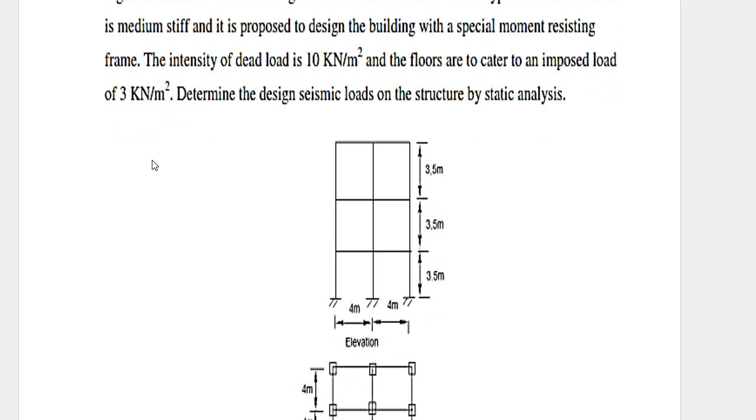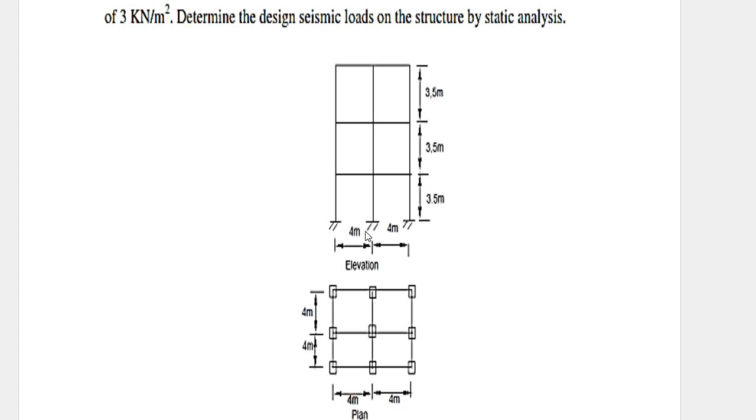So in the elevation, the height is 3.5 meter, 3.5 meter, 3.5 meter. The width between the two bays is 4 meter and 4 meter. Like that they have given the plan. Again it is 4 meter, 4 meter. This side it is 4 meter, 4 meter. Okay, now let's start with the calculation.

Here they have not mentioned any condition, so I'm assuming it is a brick infill. Consider with a brick infill. This is a condition I'm assuming. So according to this assumption, a few values will change. So we should calculate VB, that is base shear.

So base shear notation is VB and formula is Ah into W, where Ah formula is Z by 2 into I by R into Sa by g. This is the formula, where W stands for seismic weight of the building. Seismic weight is total weight of the building, and we will calculate the W later. First we will focus on this Ah.

So in this Ah, Z is a zone factor. Okay, zone factor value, how did I get this 0.36? You should go back to the problem and check the seismic zone. They have mentioned the building lies in zone 5. So according to that, I can decide this zone factor value Z. I will show you the code book.

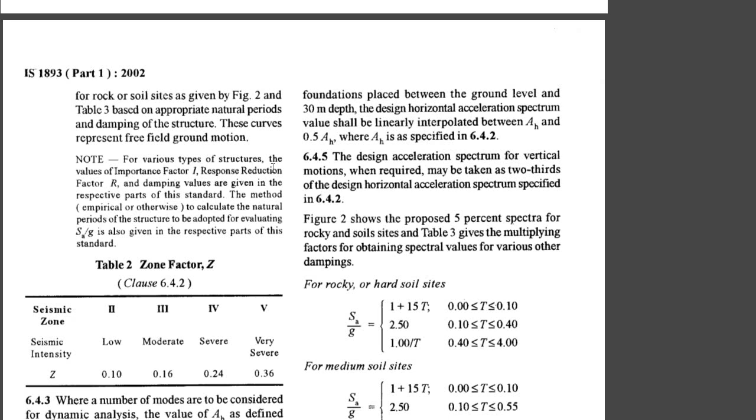Here for this problem, I am referring to the IS 1893 Part 1 2002 code book. Go to page 16. There you can check table 2. You will come across the zone factor table. So as you can see here, what are the different types of zones we have in India? It is zone 2, 3, 4 and 5. One is not there. So remember, one is not there. It starts from 2, ends at 5.

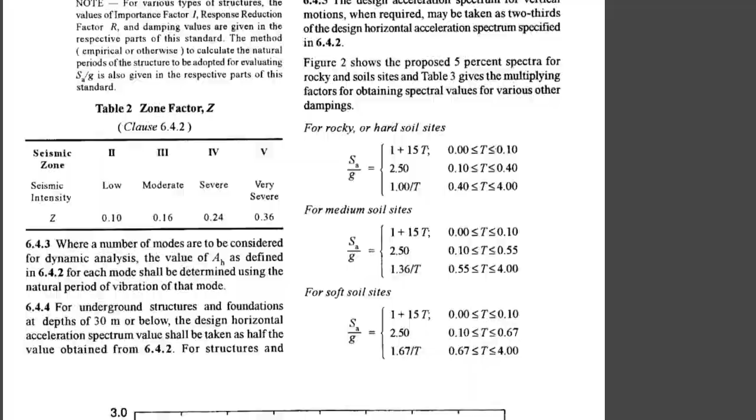So in the question they have given zone number as 5. So I should check this row. Zone 5 is this one. So zone 5 value is 0.36. So Z value is 0.36, and I have considered 0.36 in the calculation. Okay. Next, how did I take I as 1.5?

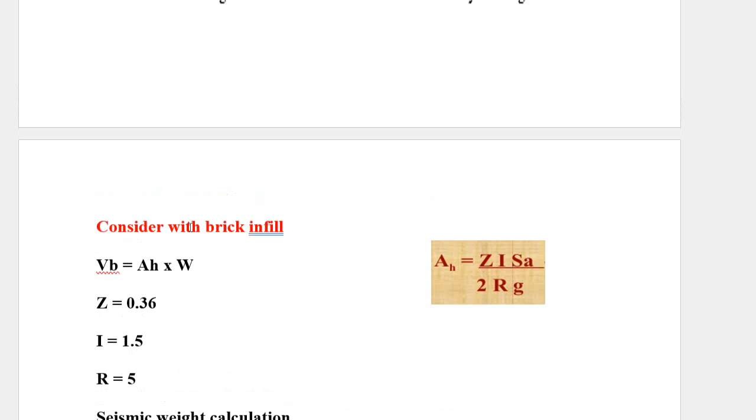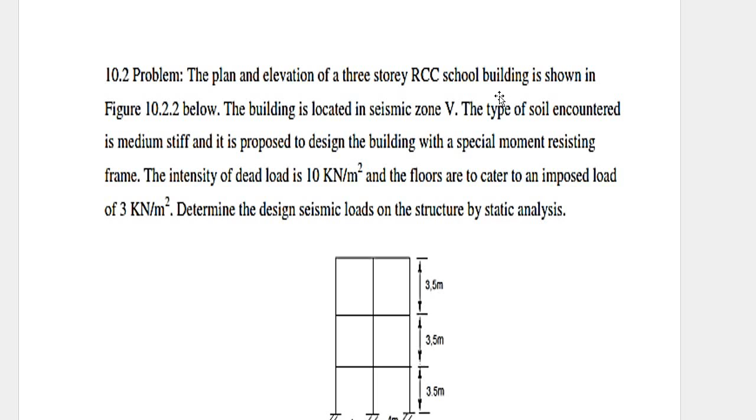For that, go to the problem and see here in the first line they have mentioned the building is a school building. This term is important. Here it can be a hospital building, school building, telephone exchange, anything. They would have mentioned anything in the question. So you should check for those terms. If school building was not mentioned, if they had mentioned only RCC building, even that is fine. How these terms are related to this I term, I will show you in the code book.

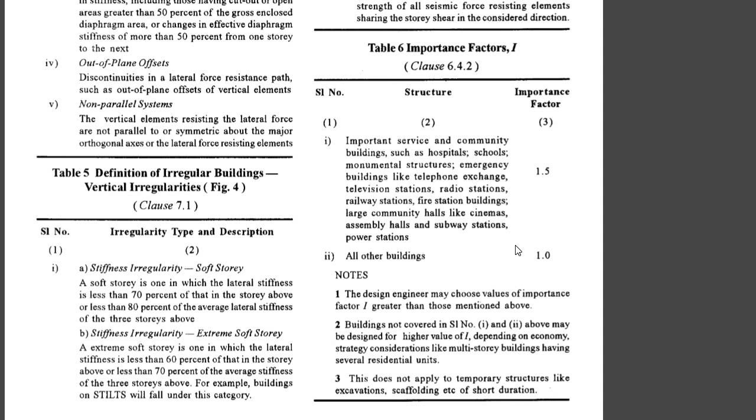Here, go to page 18 and refer to this table 6. I guess you can clearly see here, table 6 is nothing but importance factor. In this we have a first one and a second one. In the first one we have names of different buildings, that is, you can see hospital, school, monumental structures, emergency buildings like telephone exchange.

Many different names have been given here. Okay, so according to the problem they have given a school building, so it comes here. So the value of I is 1.5. So, assume if they have not mentioned any type of building, they have mentioned it is an RCC building, that's it. Then you should go for this line, that is all other buildings are equal to 1.

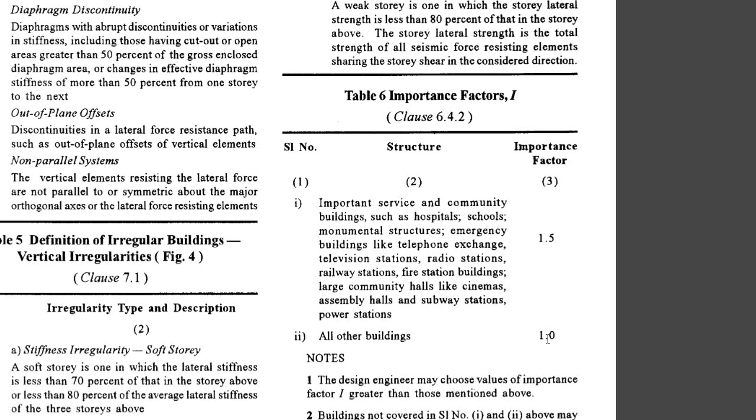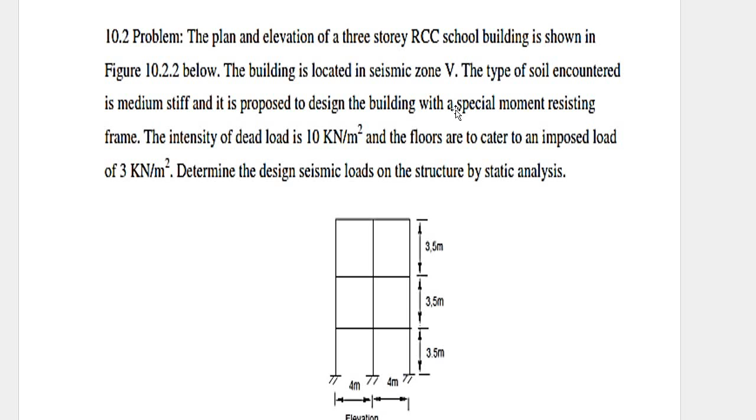Now don't get confused. Get back to here. Here it is a school building, so I should consider 1.5. So this is how I have taken 1.5. Next, the R value is 5 as they have given in the question. You can read it, building with a special moment resisting frame. That is, R is nothing but SMRF.

I will show you in the code book. In the code book, check page 23, table 7, that is response reduction factor. So here you can see, sorry, a building frame system. In the question they have indirectly given it as SMRF, means it is a frame system. So SMRF stands for special RC moment resisting frame. So they have given SMRF, so take the value of R as 5. Okay.

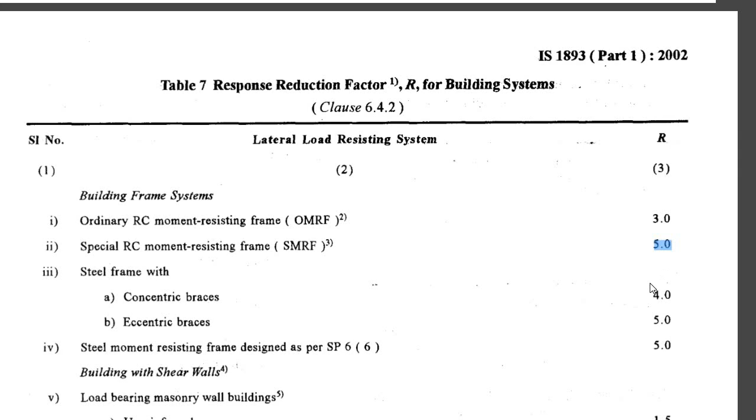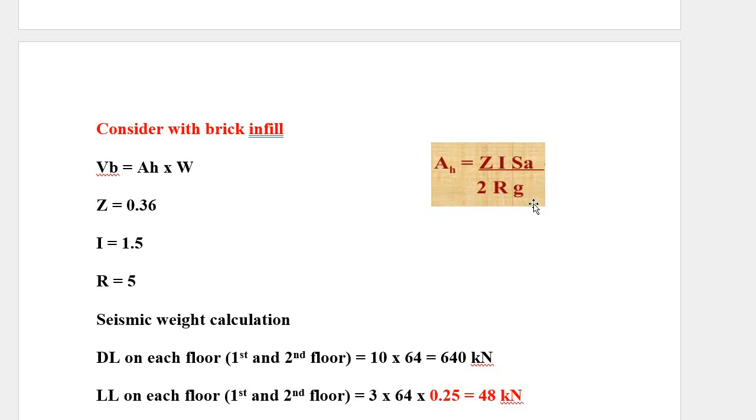Next, Z is over, I is over, R is over. These terms are over. Only Sa by g is remaining. I will show you that calculation at the end, or else let me show you now itself. Okay, Sa by g. How did I take these conditions? In the question they have mentioned it is a medium soil site. So according to that, from the code book I have considered these three conditions.

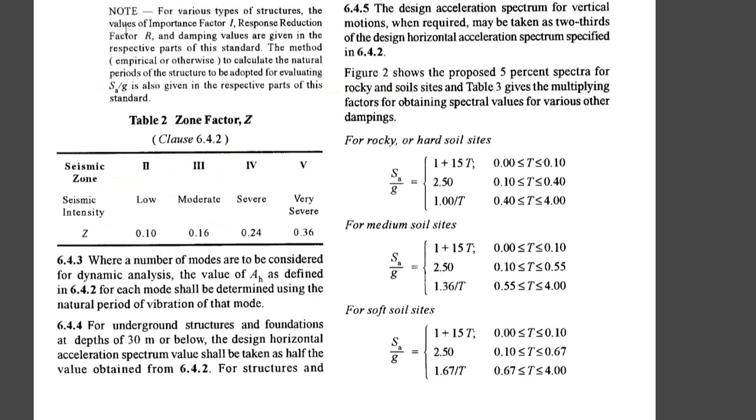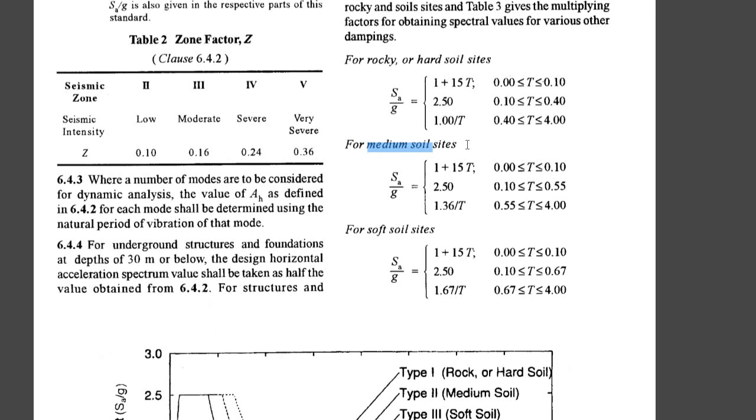Okay, so refer page 16 in the code book, and you can see here we have different conditions: rocky, medium, soil site condition. According to the question you should choose what conditions you should take up. Our condition is a medium soil, so I have copied all these conditions there. So I have written that, and also these conditions depend on the value of T, that is the fundamental natural period.

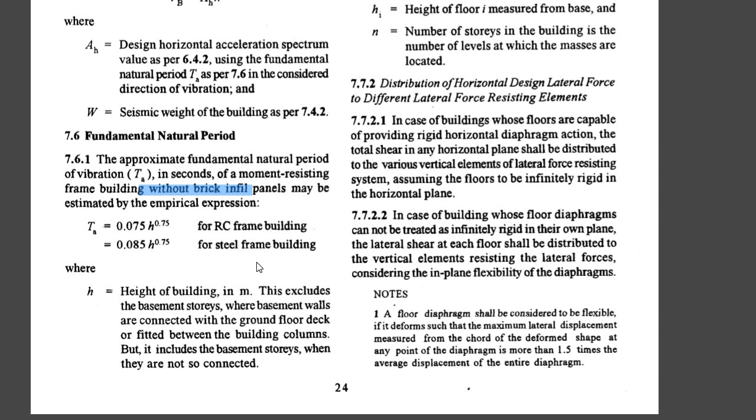So go to page 24. There you can see fundamental natural period. We have two different conditions. For that, two different types of formula are there. The first condition is without brick infill. If our condition is without brick infill, then in these two formulas we should consider one. But remember, our condition is with brick infills. So this is the condition there.

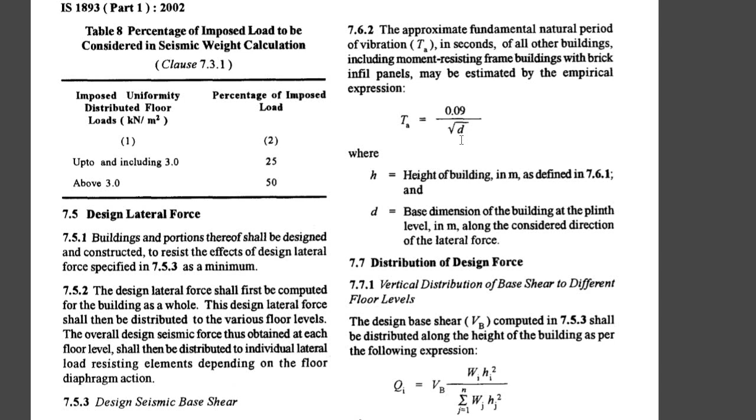So if that is the condition, the formula will be Ta equals 0.09 into H. That H is missing in the code book. H divided by root D, where D stands for base dimension of the building. Now in my problem, I have considered this formula, that is Ta equal to 0.09 into h by root d. Okay, h is total height of the building.

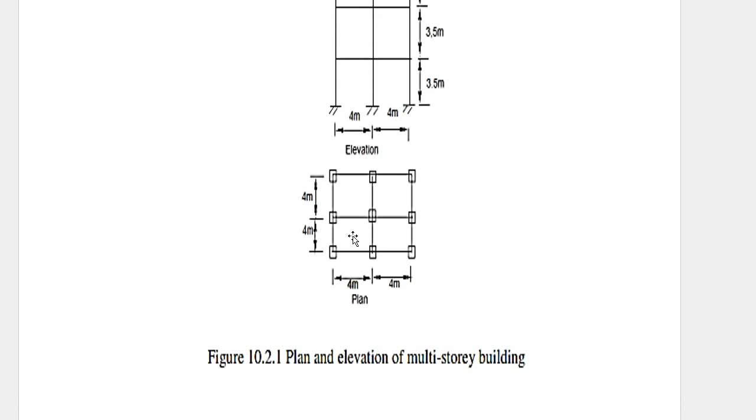You should add each story height 3.5 plus 3.5, or you can multiply by 3 because all the three story heights are the same, so I'm just multiplying with 3, so I will get 10.5. And d equals 8 means we should refer the elevation. Here in elevation they have given the base width as 4 meter plus 4 meter, so d equals 8 meter. H is known, D is known. Calculate T.

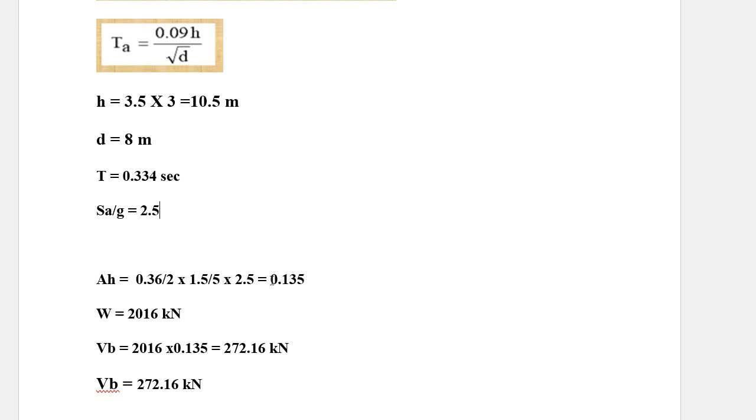T is 0.334 seconds. So go back to these three conditions. Check that this 0.334 lies in the second condition. That is, it lies between 0.1 to 0.55. So the Sa by g value is 2.5. Okay, next substitute all these Sa by g, Z, I, R in Ah. We will get 0.135. This Ah value is ready.

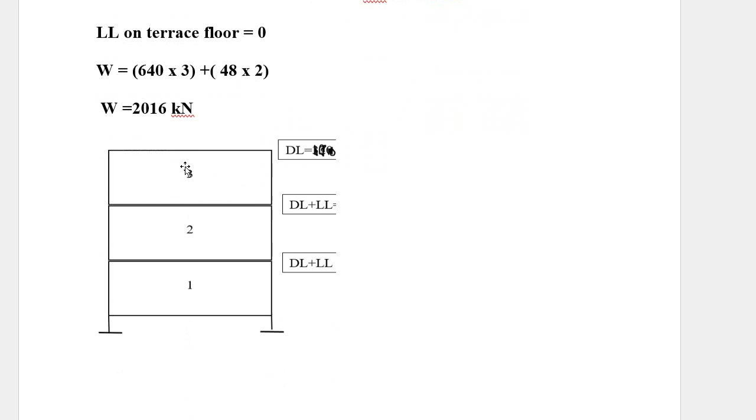Now the most important calculation is the W value, that is seismic weight calculation in this problem. As I told, this is a type 2 problem. This seismic weight calculation is a tricky part in this type. Next, the dead load calculation. As you can see in the diagram here, it is a three-story building. One, two, three are mentioned, and the most important thing is what type of load is coming on each story.

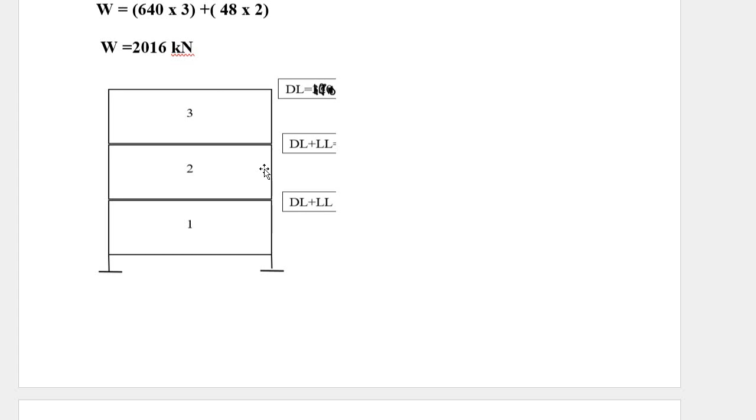So I will start with the base. At the base, we will get dead load plus live load. Then at the second story, it is dead load plus live load. But when you move to the topmost story or the terrace, only dead load is present, live load is absent. Please remember this condition, that is live load is absent on the terrace floor.

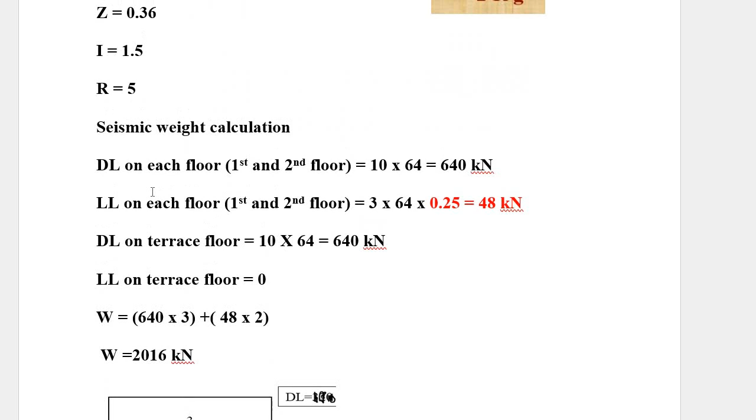So I have mentioned only dead load here. According to this I have done the calculation. So get back here, dead load on each floor, that is first and second floor. We have first and second floor dead load, so I have calculated separately.

So according to the question, it is 10 kilonewton per meter square into 64, means 8 into 8, that is the area value. 8 into 8 you will get 64 meter square, then meter square will get cancelled. Answer is 640 kilonewton. Okay, next, live load. So live load is 3 kilonewton per meter square into 64, the area, that is 8 into 8 meter square. Meter square will get cancelled.

Then what is this 0.25? That is the imposed load which is taken from the code book. Okay, see, refer page 24 and table 8. Here we have two conditions. According to our problem, the live load value is 3. So they have clearly given up to and including 3, we can take the imposed load in percentage, that is 25%. I can multiply the value into 25%. So 25% is nothing but 0.25. So I have considered this 25.

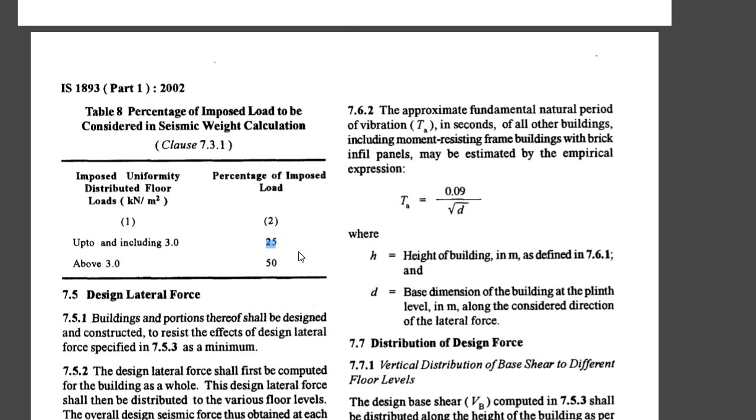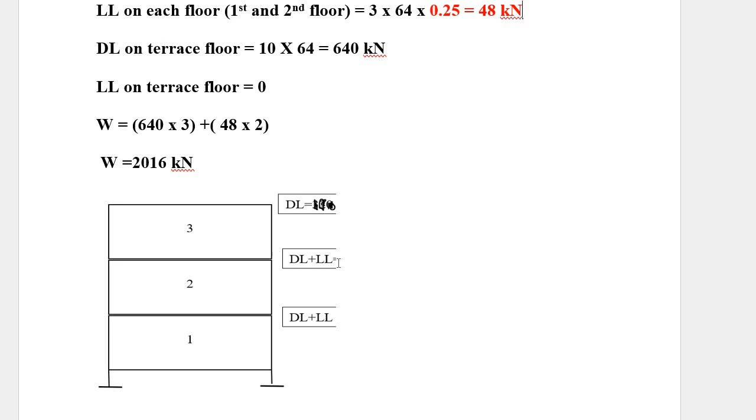How did I take live load? In the question they have given it as 3. So for 3 I should take it as 25%. 25% means 0.25, so multiply that. So only I have highlighted in red color. So multiplying we will get 48 kilonewton. Live load is present both on the base as well as the next story. So 48 is the answer.

Then the dead load on the terrace I have simply calculated separately, don't get confused. Sorry, not live load, I'm talking about the dead load. Dead load on the terrace floor is 10 into 64, that is 10 into 8 into 8, we will get 640 kilonewton. The live load on the terrace will be 0. There is no live load on the terrace. As I told, this point is important, this is 0.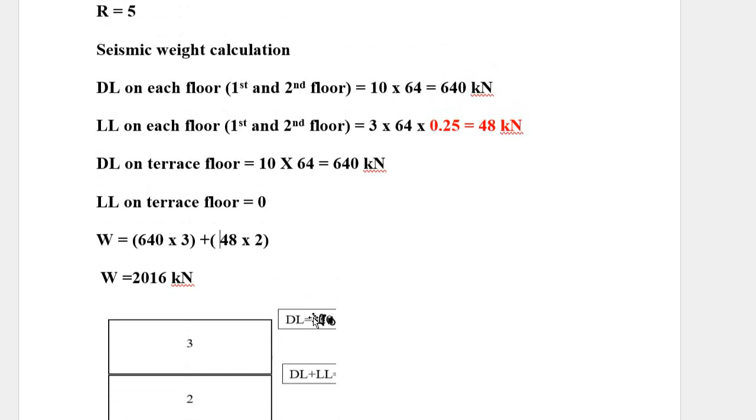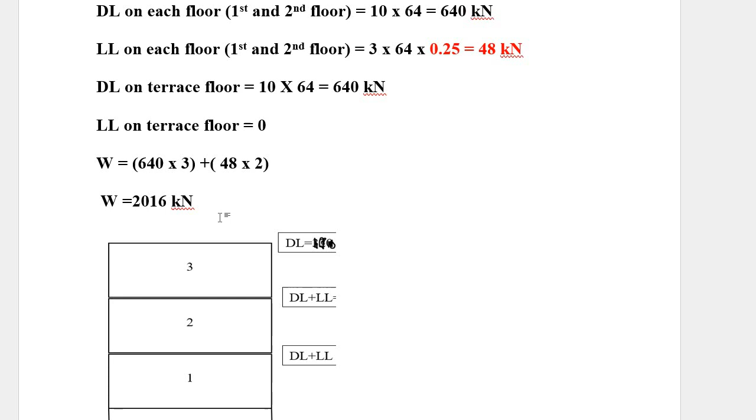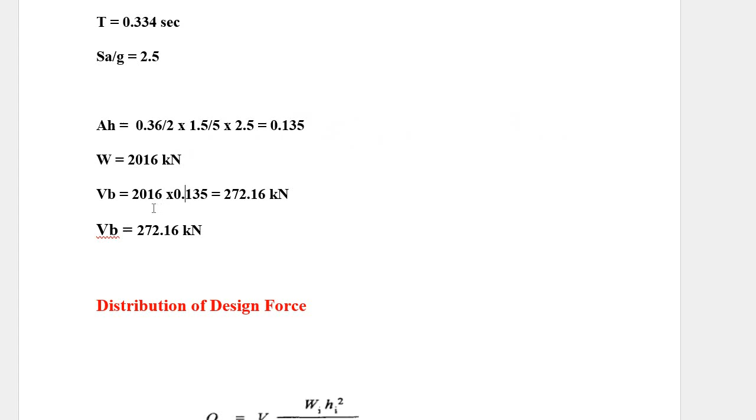Okay, now what is the total weight? See here, dead load is present in all the floors, so 640 into 3. But live load is present only on the 2 stories, so 48 into 2. So total weight is 2016 kilonewton. So this is how the W should be calculated. Now go back here. Multiply Ah into W, you will get VB as 272.16 kilonewton.

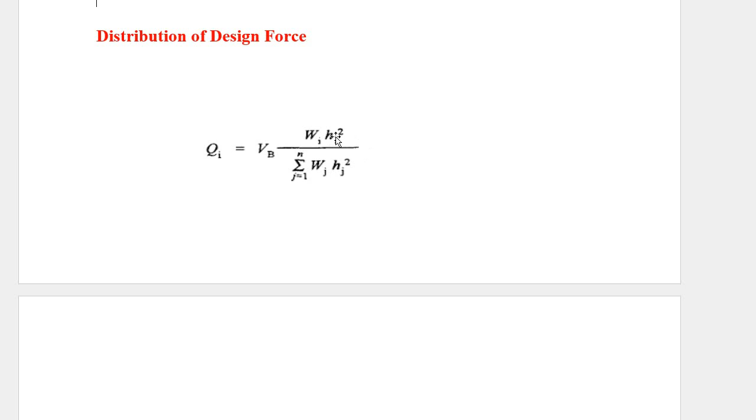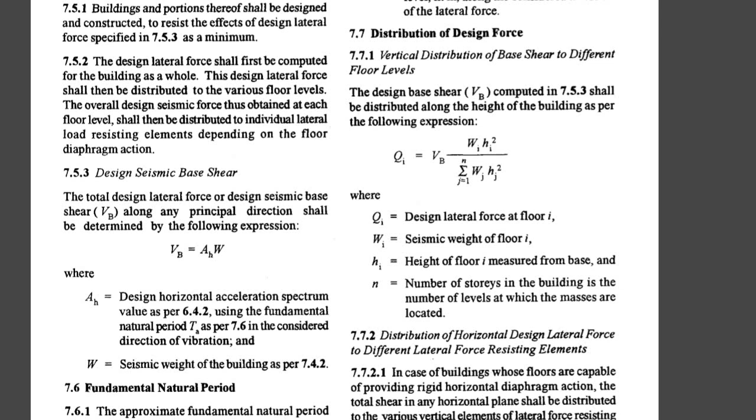Next is the design force. This Qi formula you will get in the code book, that is page 24, distribution of the design force. From there I have calculated this table. So three stories are there. I have written from the bottom as 1, 2, 3, and the weight is important here. From the bottom, dead load plus live load is 688. Next story it is again 688, and at the terrace only dead load is present, so 640 I have written.

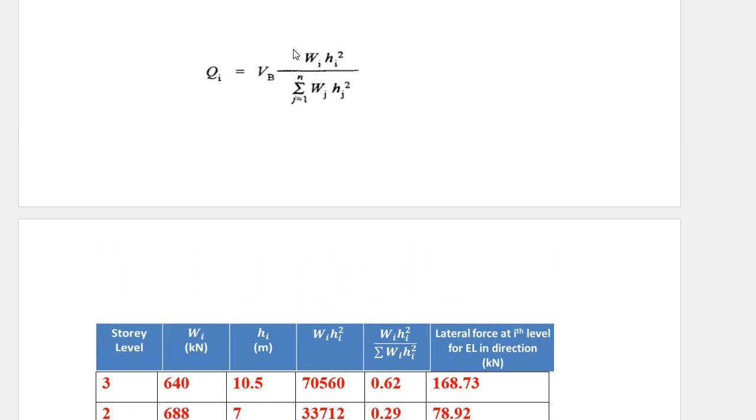So remember, this second column is important. Don't make any mistake there. Then in the third column, from the base you should add the height. Base is 3.5. Next story is 3.5 plus 3.5, it is 7. 7 plus 3.5, it is 10.5. Next, multiply the second column and the third column. We will get the numerator value of Qi, and the denominator is the summation of all these values, that is 1,12,700. Numerator by denominator is the value we require. So 70,560 divided by summation, we will get 0.62. Like that, do it for other values.

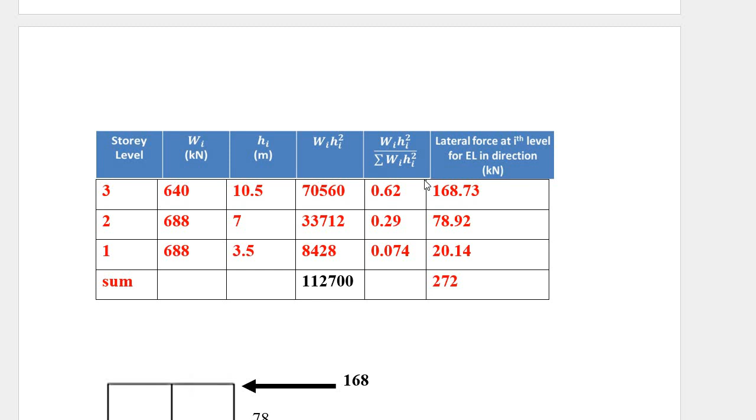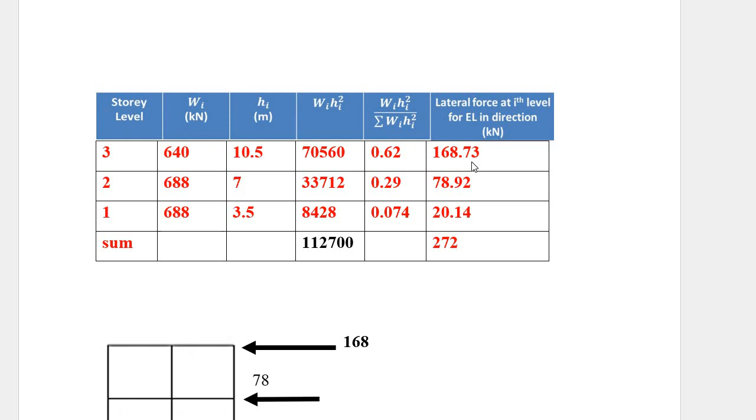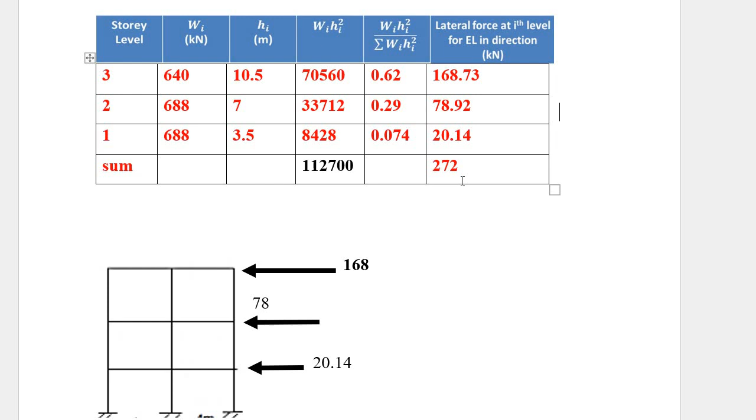Next is the lateral force, means Qi. Last column is Qi. We have numerator by denominator; multiply that with the VB value. VB value is 272.16. So these are the values we are getting: 168.73, 78.92, 20.14, and if we do the summation we will get 272. That means our VB should match with this summation. VB is 272, and in this table the last column summation is 272.

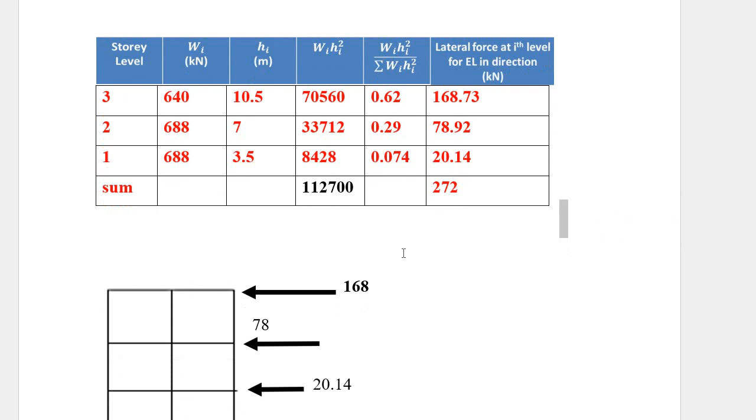That means whatever we have solved is correct, and whatever last column I have got, I have just represented it in a diagram. Okay, hope you have understood this. Thank you.